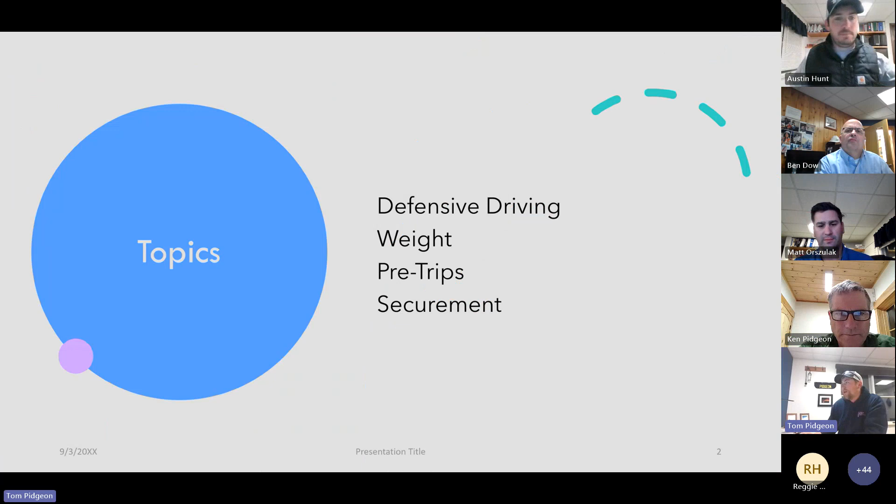There we go. Right. So we're going to talk about defensive driving, your weight, pre-trips, and load securement today.

So for defensive driving, we're going to follow the same principles that we talked about quite a bit. It's just important to remember that you have increased stopping distance and you're going to have fewer places to go. So where you might normally be able to merge and get out of the way of something, you might be stuck in the lane that you're in. So just make sure that you're looking way down the road, looking as far as you can, and planning for the worst case scenario as you drive.

Being alert constantly is big. You have larger blind spots, so you might have cars come up in weird places that you don't expect. When you're turning corners, you might not be able to see everything as well as you normally would, and when you're backing up, it's significantly worse.

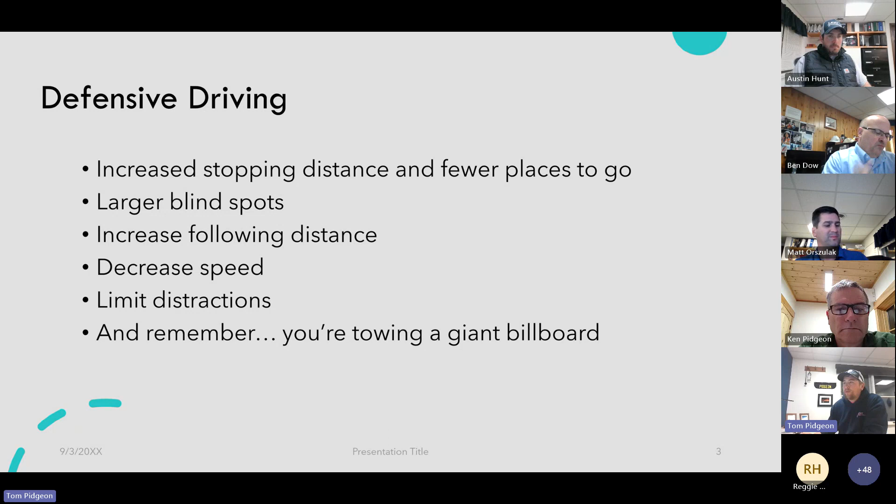You want to increase your following distance, and like I said, look far ahead. You want to decrease your speed. We shouldn't have distractions while we're driving anyway, but you want to limit them. If you have a passenger, try to avoid conversation that you get too involved in that might make you think about things other than the road. And remember, you're towing a giant billboard, so just keep that in mind as you drive. People do love to call and complain about driving.

So next thing we're talking about is weight. Everything that you're towing must be within their gross vehicle weight rating. So most of our trailers are either 9,999 pounds, either derated or they're underneath that just in how they're built. It's also important to follow what you have for an axle rating on those.

So if you have two 3,500 pound axles and you're only going to be towing 7,000 pounds in total, you're obviously below the 9,999. Once you get over 10,000 pounds, then the trailer is added on to the GVWR of the truck. So 26,000 pounds is the cutoff for needing a CDL Class A.

So if you have a CDL Class B, you can tow with a dump truck, a large dump truck, a quarry trailer derated to 9,999 pounds. But the minute that you go over to 10,001 pounds on the trailer, then you now need a Class A CDL.

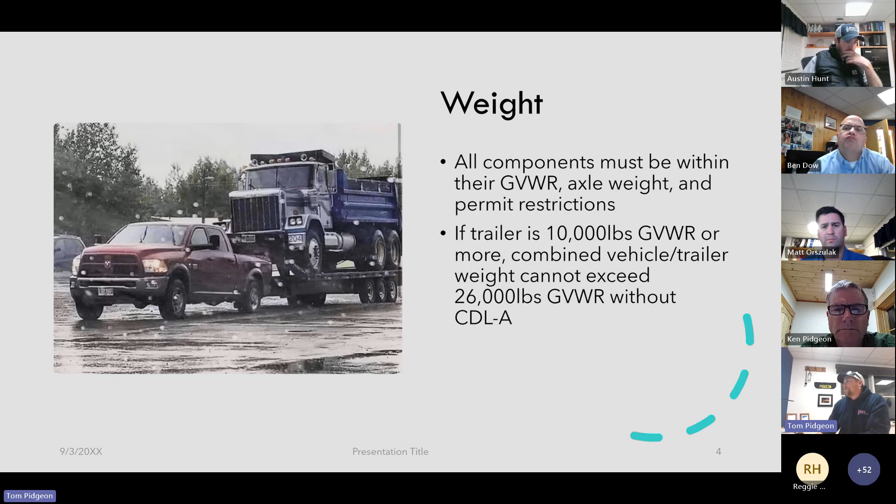So we're just going to talk about the pre-trip. That's the base part of this.

First thing you want to do is perform a 360. Make sure everything looks good, no major rot or rust repairs needed that would negatively affect the trailer and make it unsafe for the road. Walk all the way around it, looking for anything out of place or dangerous. Make sure everything's securely fastened, your decking's good, and your jack's securely up. I've seen a couple times the pin's hanging and not clipped in all the way, so that could pop out on the road and the jack would drag and break off.

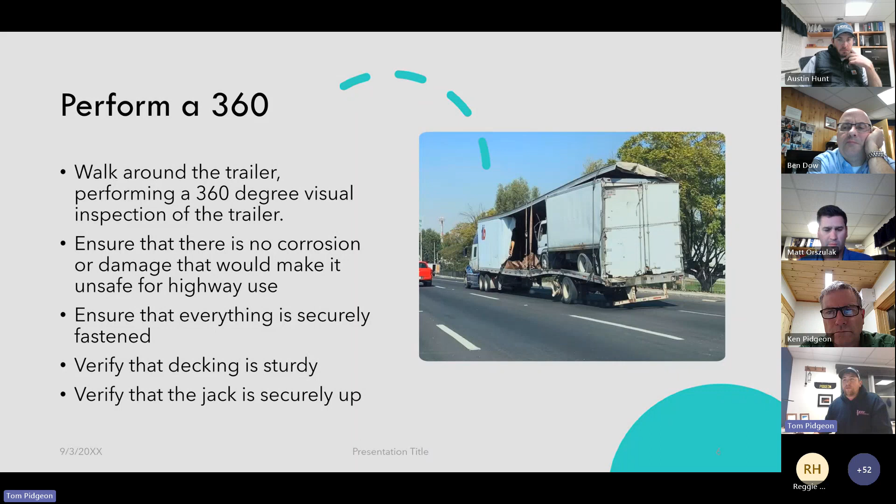So you want to check your tires and lugs. Make sure your lugs are tight, no rust streaks or anything like that. Make sure your tires are properly inflated, have adequate tread, no dry rot, weather checking, bulging, gouges or cuts. If you have a spare, make sure you check it. If you have a single axle trailer, as I learned the hard way, you probably want to make sure you get a spare from the shop before you leave.

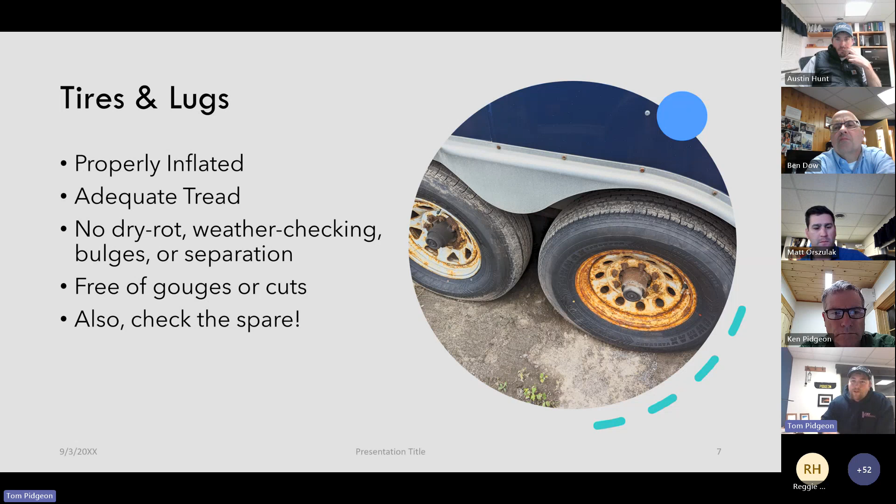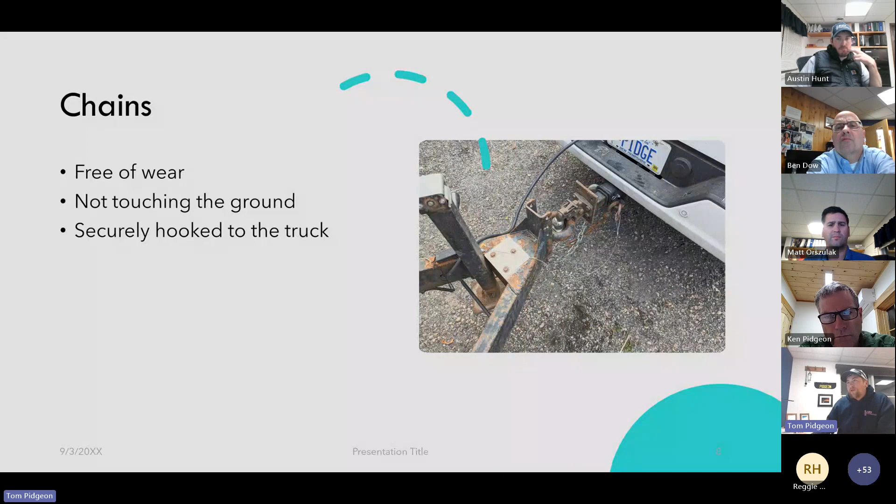You want to make sure your chains are free of wear. They don't need to cross, but sometimes it's easier to cross them to keep them from dragging on the ground, because once they start to get drag marks, DOT will put you out of service. DOT is going to be cracking down on these smaller trailers. Make sure they're not touching the ground and securely hooked to the truck, not the hitch.

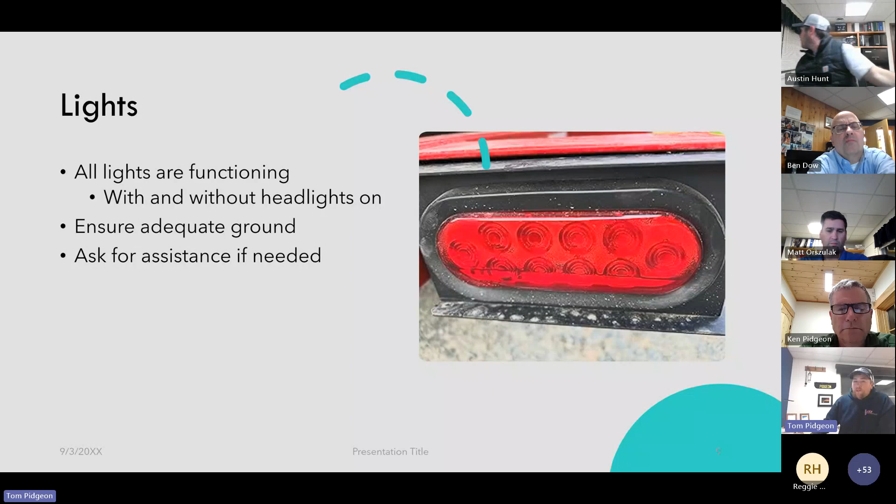You just want to make sure all your lights are functioning all the way around, with and without your headlights on, because your running lights will be on the trailer and it affects your brake light setup. Make sure you have an adequate ground. If they're fading in and out, go talk to the shop and ask for assistance as needed, like with any of these things.

With your brakes, that's the big thing. You want to securely attach to the truck. I have a clevis on my truck, right where you hook the chains, holds it really well. You don't want to hook it into your pin like you see over there. Once you get in the truck, make sure it's registering on your brake controller. If you don't have a brake controller, you shouldn't be towing a trailer with trailer brakes.

One thing DOT is definitely going to be doing is tug testing. They're going to either put a multimeter on the battery on the trailer, or have you unplug the pigtail from the truck. They're going to pull the breakaway and have you try to drive, making sure the trailer stays still. So you should be doing that before you leave as well.

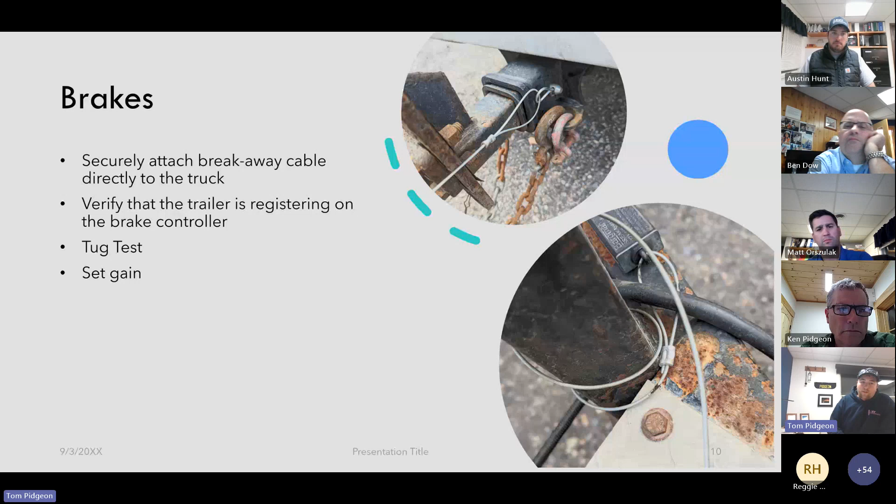And then before you leave, you just want to set the gain. Usually what I do is drive 5 miles an hour or so through the yard, tap the brake controller, and I want it to slow me down but not lock up and drag.

You want to make sure your load's secured, and use the proper chains and straps. If you don't know what the proper chains and straps are, ask somebody. Use proper securement points, and check regularly. I usually strap it down, check before I leave, and then check everywhere that I stop. Loads will shift, so you just want to keep your straps tight.

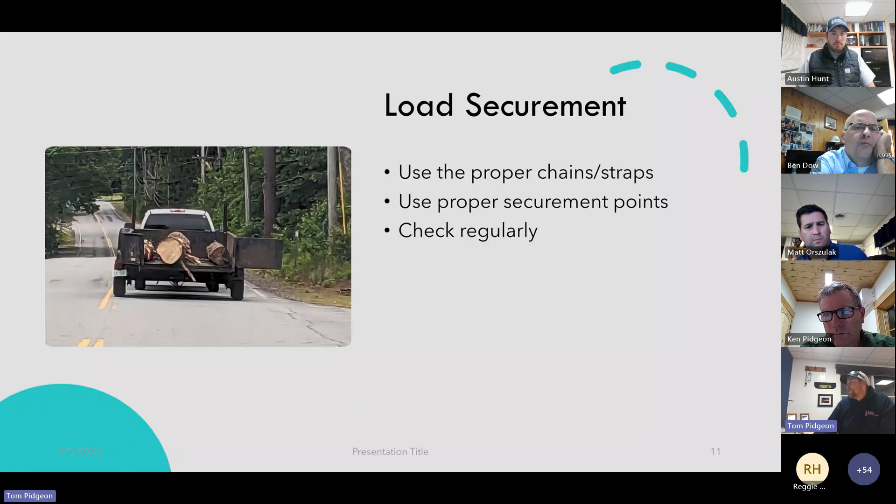And that wraps it up for today.

Thanks, Tom. I have just one thing to add to your really good PowerPoint, just making sure we sweep all the stones and debris off all of our trailers. We've been getting a lot of calls for stones leaving trailers lately. Make sure we're sweeping good.

One other follow-up as well: you didn't mention the weight restrictions on the road as a restriction. The way I look at it is that the vehicle has its restrictions, the registration has limitations, the roadway has the limitation, and the driver has limitations. So, good presentation.

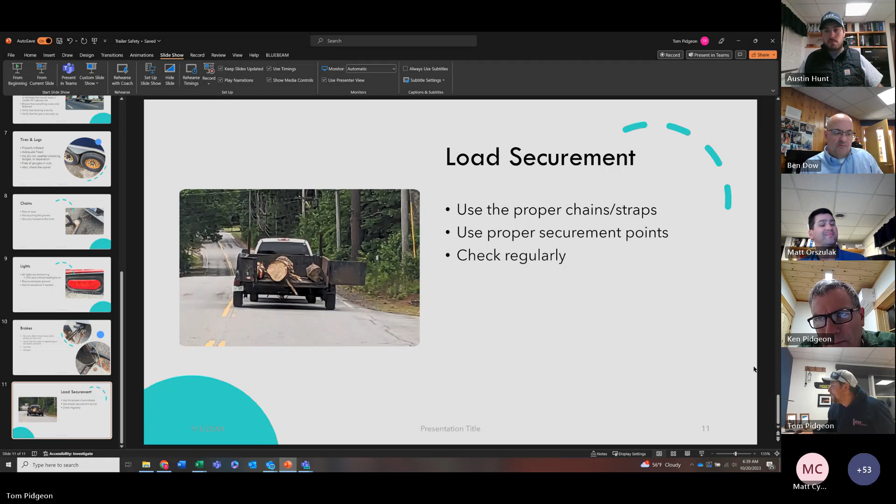All right, I'm trying to unshare right now. Okay, I'll try to take over, my mouse is stuck, so I'm just gonna leave. Here we go. Okay, let me see, is this the screen I want? You see my screen? We have it. All right.

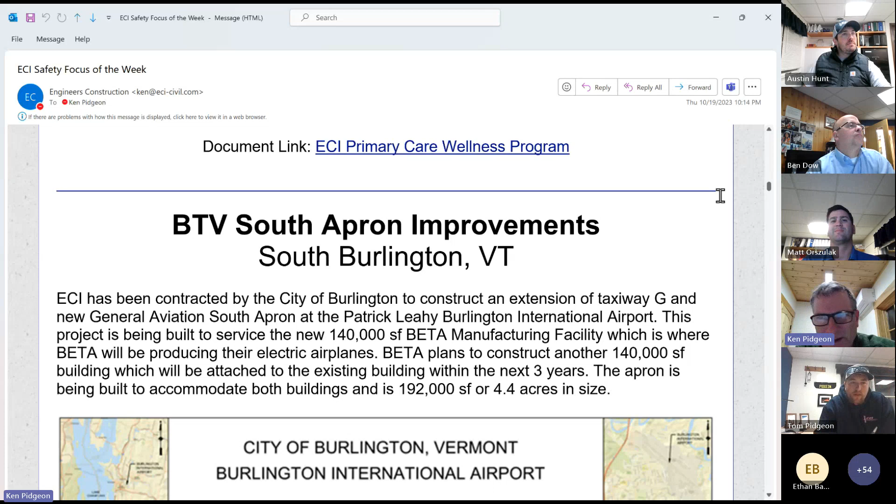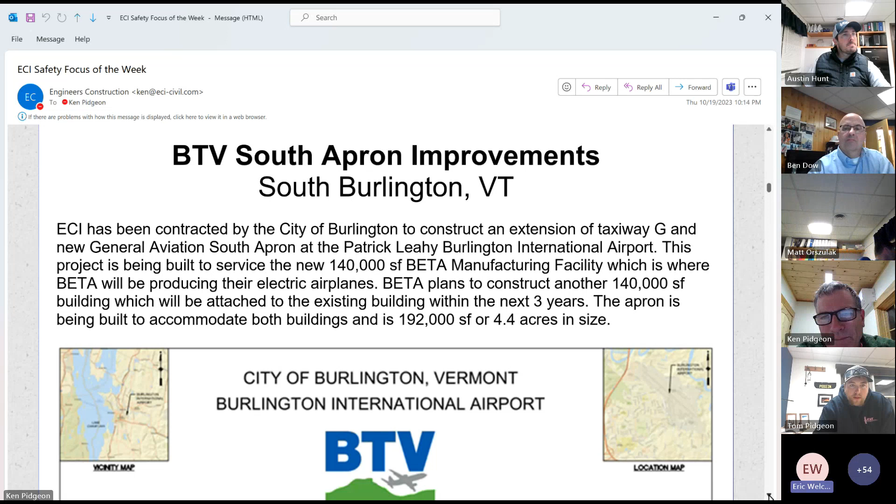Eric, are you out there? Welcome. I hope I moved that photo to the right spot — I got confused after I put it together last night. I emailed you but didn't hear back, so I just sent it off the way I had it. It's all good. Do you want to take over or should I just scroll ahead? You can scroll ahead and I'll read. I'll slide it up a little further here — how's that? Looks good.

ECI has been contracted by the City of Burlington to construct an extension of taxiway G and a new general aviation south apron at the Patrick Leahy Burlington International Airport. The project is being built to service the new 140,000 square foot Beta manufacturing facility, where Beta will be producing their electric airplanes.

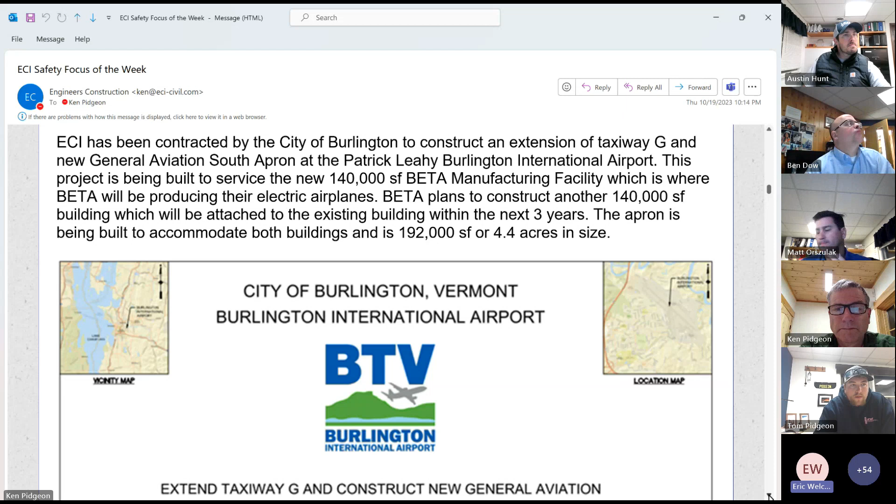Beta plans to construct another 140,000 square foot building, attached to the existing one, within the next 3 years. The apron is being built to accommodate both buildings and is 192,000 square feet, or 4.4 acres, in size. That's a big building — big apron too. This is just the cover sheet of our contract.

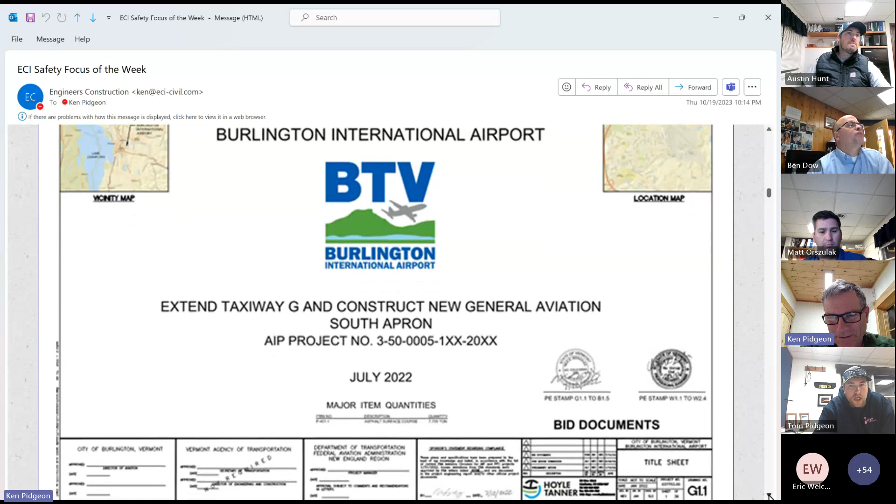The project has had multiple challenges since it was bid. It was bid in August of '22, and because of permit and funding issues, the contract wasn't signed until May of '23. By then, ECI had already acquired enough work for the 2023 construction season, so we had to seek out a subcontractor to perform the drainage scope in order to meet the new schedule, which was to provide Beta some sort of access over the new apron this year.

There was a water line and storm drain that needed to be installed inside and under the airside of the fence. To be allowed inside the airside fence to work, a person must be badged, or be within 50 feet of a badged person, called an escort. An application, online training, and an airside ride with BTV ops was required to obtain a SIDA badge.

The water line was located along a taxiway, so there were restrictions on where we could put our spoil piles and on the heights of those piles. When we installed the water line across the apron, we had to shut down the taxiway, which involved temporary striping and installation of barricades. The temporary striping provided planes an alternate route to use while the taxiway was shut down.

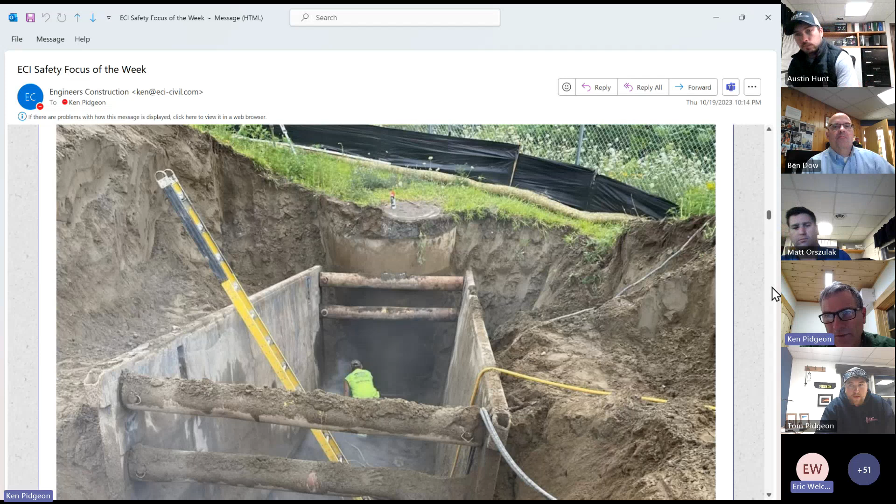You want to keep scrolling through. I think

This was one of two storm chamber systems on the project. One is specifically for a trench drain where de-icing occurs on the planes. That's this chamber system, and it has a liner to keep that water isolated in the chamber system. The other chamber system was for another set of trench drains where they don't put any chemicals or de-icing on the planes. They have to pump it out and transfer it to a treatment plant.

Underneath the fabric there, underneath these chambers, is 12 inches of stone. And I forget, Mark might remember, but I think there's 24 inches of concrete sand. And then there's an 8-inch perforated pipe. So the thought is the water goes down through the stone, the sand, and into the pipe. By that time it's treated, quote unquote, and then it goes out to the storm drain system.

Even the antifreeze in the de-icing area, you mean? Yes. And this was Ken - I don't know if you remember, but we had to come up with the bearing strength of this native soil. Oh, yep, yep, I guess it worked.

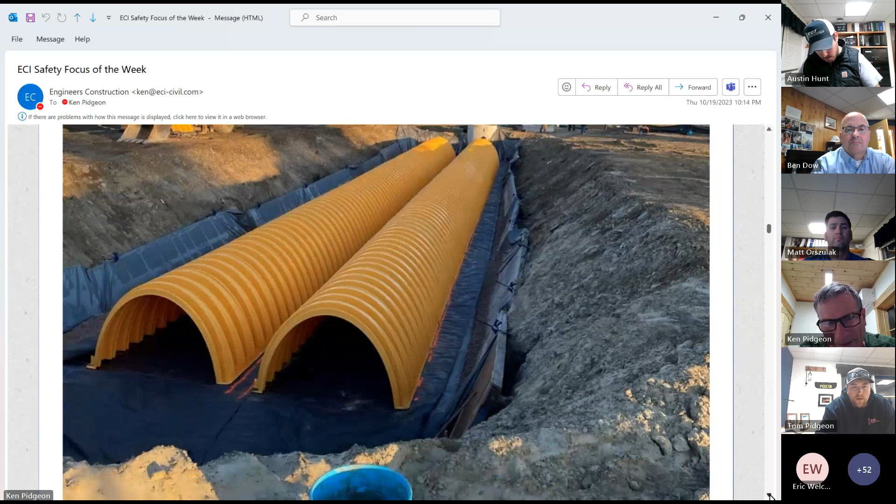Yeah, okay, all right, good with this slide? I'll advance. If I can get to the next one without overshooting. There we go, there we go.

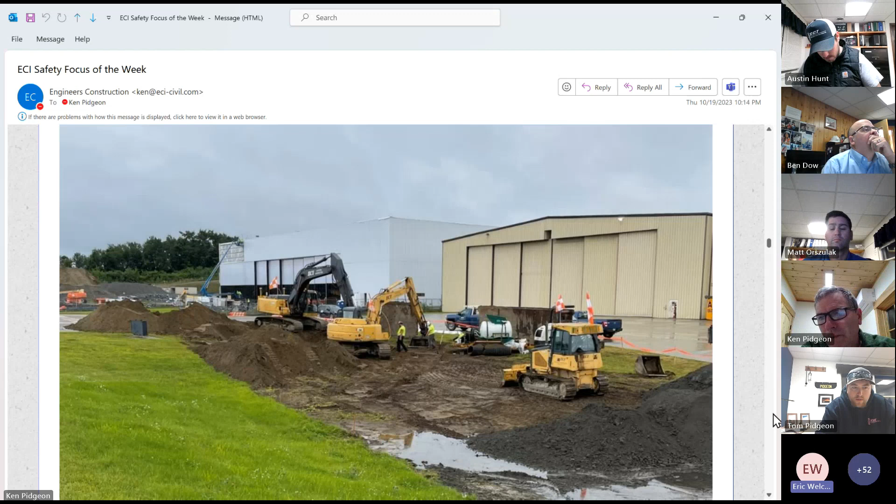You can keep scrolling to the next slide. There's a good picture of where we connected up by the apron sign, is where we connected to the existing water main. And you can see the barricades in the background when the taxiway is shut down.

And then this road on the left here is where the planes use that as access to the runway while we had the taxiway shut down.

I think the next slide. Coordination - a lot of coordination with the airport then. It's a lot of coordination, and then when you think you have things coordinated and you go to do the work, they say, well, you can't do it right now. You have to wait a few hours because we weren't quite ready.

There's a good picture of the barricades that we used to shut the taxiway down. They have lights on top, solar powered, so at night the planes could see them. You can see the crown of the surface there pretty clearly with those little segmental barricades.

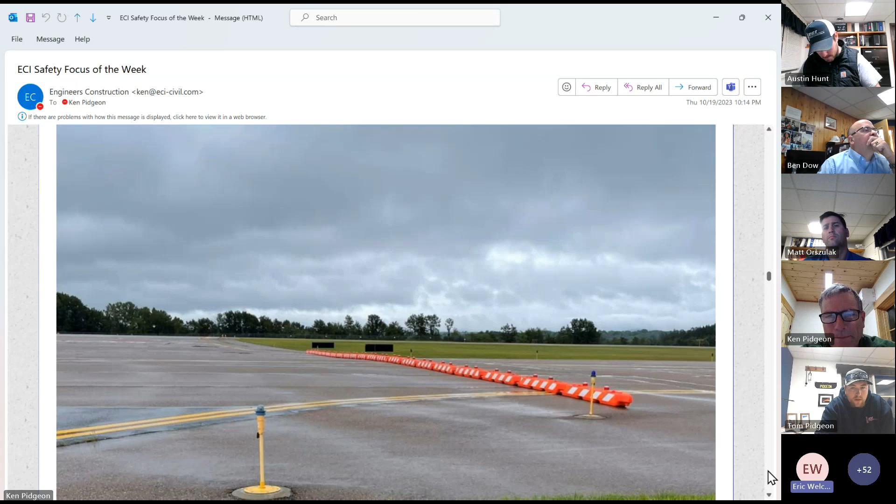Yep, and the runway is actually in the background. The runway. Oh, okay, yep. I can keep there. Oh, okay.

And this is Dylan's crew putting the water main, 8-inch ductile wrapped, across the apron, and you can see the thickness of the pavement. There's 9 inches of pavement there.

And one of the other requirements, FAA requirements, is 100% modified compaction underneath pavement.

So that sheep foot roller worked pretty good in the sand backfill? It did, we ended up going to the smooth drum. Did you? Yeah, and just because the sheep's foot, the little feet on it were 4 inches, when it went through it wasn't giving very good compaction. Oh, well, compaction was there underneath, but they weren't testing that deep.

So right, well, they weren't testing very well then. I'm sure we had better compaction with this overall, but they liked their numbers better, so they had us do it differently, with less compaction just to have a good number. And plus we're using native soils. Mike Ronaldo was doing Proctor's, and you know, it's a big effort to make it happen.

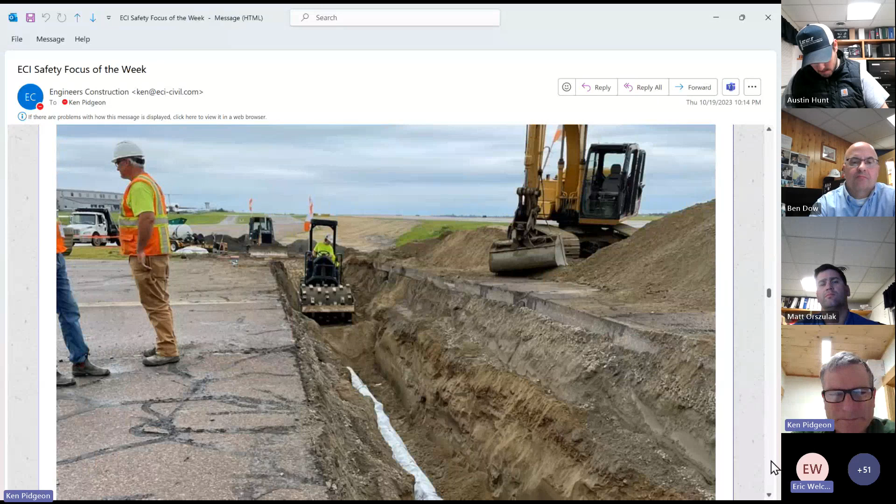So the major challenge for this project was scheduling the ECI start date. The apron site was a staging area for the Beta building project. There were stockpiles of sand, gravel, concrete, and a geothermal piping trench running right down the middle of our site. We obviously could not begin our work until the staging area was removed, and Beta was not really interested in moving the piles as there was no place to move them to. This delay ultimately made it so Beta would not have access to the taxiway over the apron this season, and we had to build them a temporary road from their hangar door to an adjacent apron to provide temporary access until the project is complete.

So this following photo is a real good photo of what we were up against.

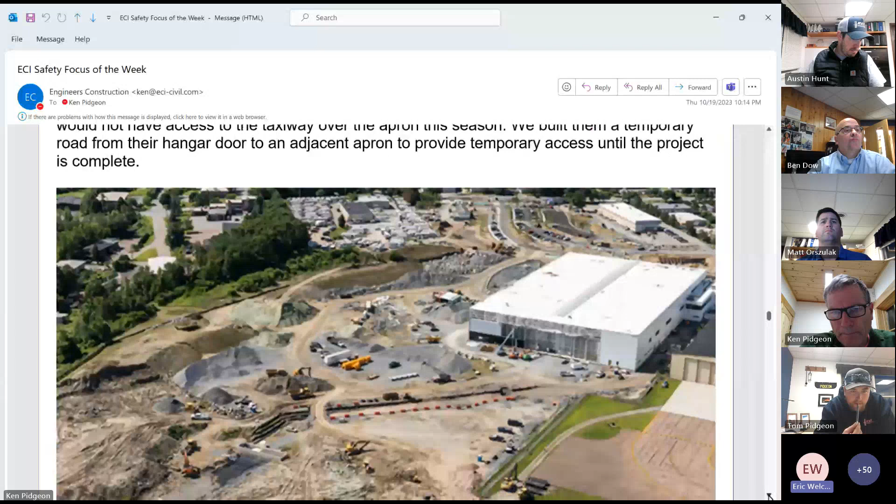So there's the Beta building, and you can see at the bottom of the screen, Jay McDonald's working. That's the area of the storm chambers. Dylan's crew is just inside the fence. There's the water pipe right at the end of the taxiway.

Can you put your cursor on that geothermal trench? Right here, yeah. So that trench basically split our site in half. And then you can see all the piles of dense grade, the trailers, and then up in the top corner was a giant pile of 3/4 inch stone.

Monash was working on the geothermal. SD Ireland was working those stockpiles every day. As you can see, the construction was going on the Beta building hangar doors. Monash was working on the stormwater, and we were laying water lines. So there's 5 different contractors working on this site when we first started.

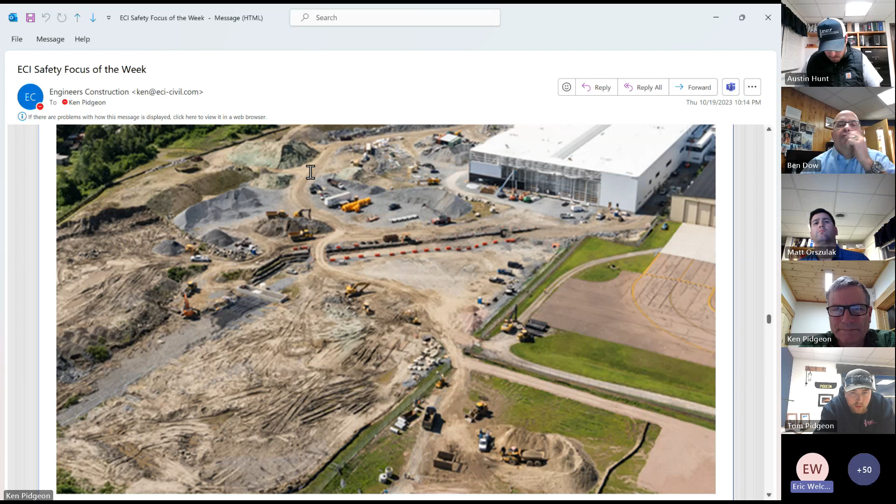Yep. Yeah, yes. Okay, next slide, next slide. Okay.

So this is Derek, I believe, Canilian, loading the mass excavation. Derek and Nick Wilson loaded out the majority of the stuff. I'm sure they were dreaming about loading trucks in their sleep.

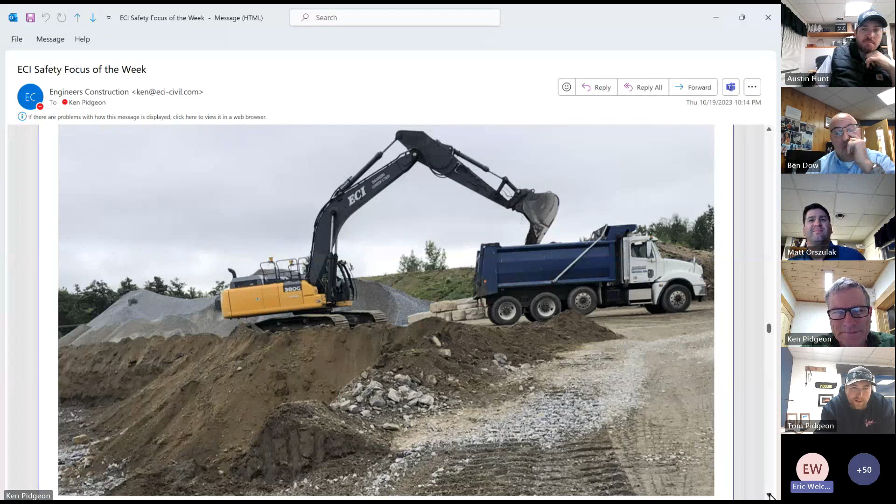Is the narrative below this slide, Ken? I think so. There we go. Yep, oh, there we go.

So the project included a mass excavation and export of what turns out is going to be 68,000 cubic yards of material when we're complete. The majority of the material was exported for approximately 6 weeks with an average of 2,200 cubic yards leaving the site per day. We had as many as 17 trucks per day hauling to multiple locations with men and equipment at each location handling the material.

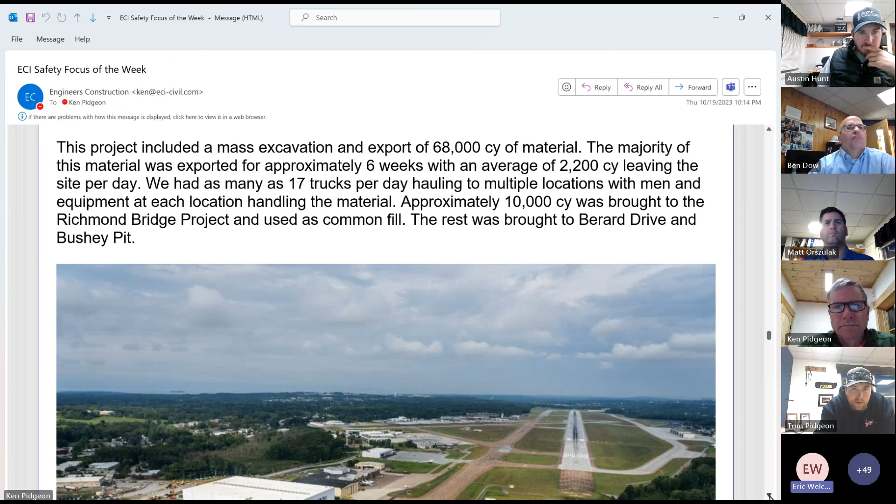Approximately 10,000 cubic yards was brought to the Richmond Bridge project and used as common fill. The rest was brought to Berard Drive and Bushey Pit.

These aerial photos were taken by Beta, and they're really good photos to show our site. It's a big site. This was taken, I think, must be at the beginning of October. As you can see, that big, huge pile of stone is still in the way.

So we basically chased them out of the site. Charlie did with the excavation, and we ended up having to move some of the piles, which we got paid for. So this is a good picture.

You can see the runway. You can see taxiway G, and you can see our apron site. Very cool picture.

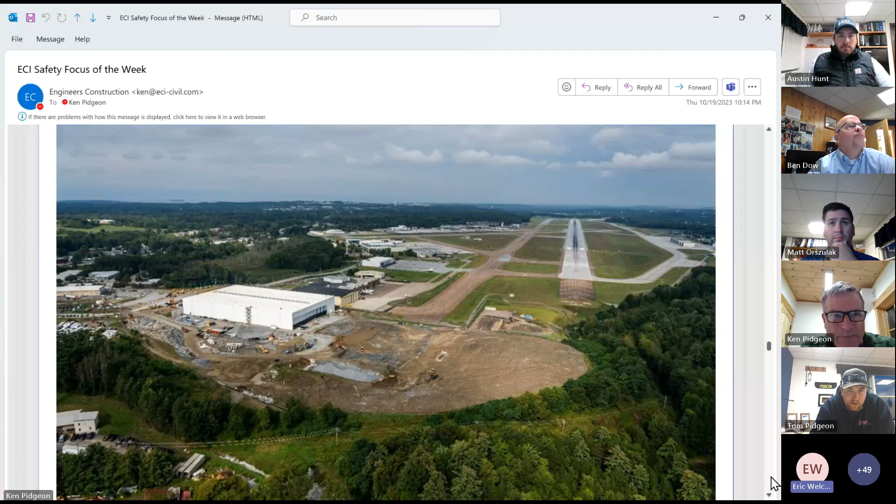I think the next one. Blasting, drilling and blasting.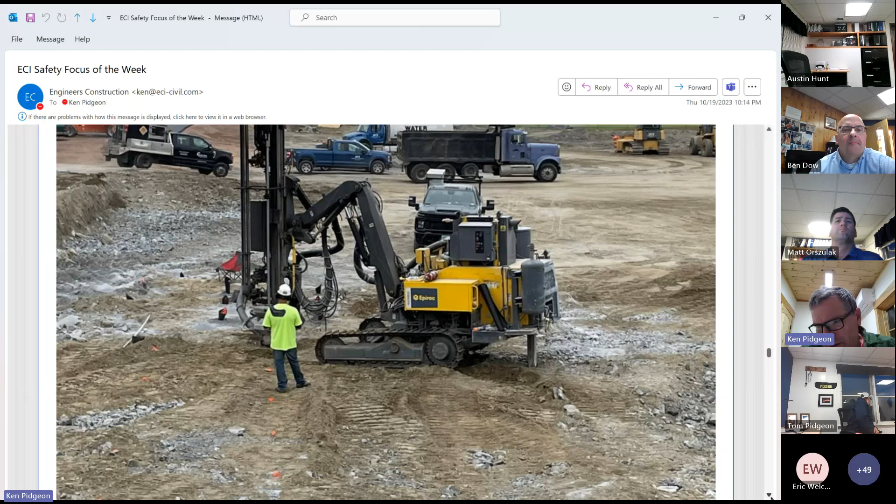There was a blast. There was a rock item in the... there's a rock pay item, but if you looked at the borings, I think you have text here below, right? I don't. I think it got lost. I was looking through. Oh, did it? Oh yeah, okay, all right, sorry about that. That's okay.

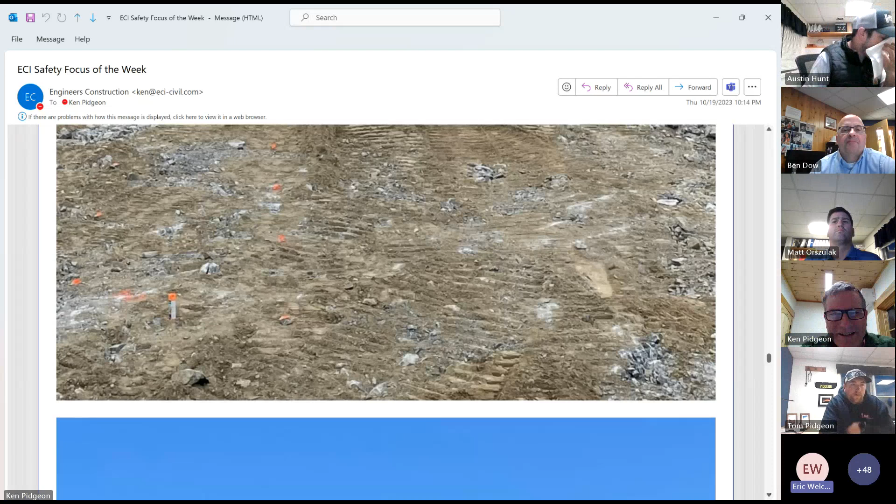There was a pay item for rock excavation, and there was soil borings given in the bid documents, but the soil borings really led you to indicate that there wasn't going to be much ledge here. So we bid the job thinking that we could just hammer out what was there. Well, when we actually excavated the material out, there was ledge everywhere.

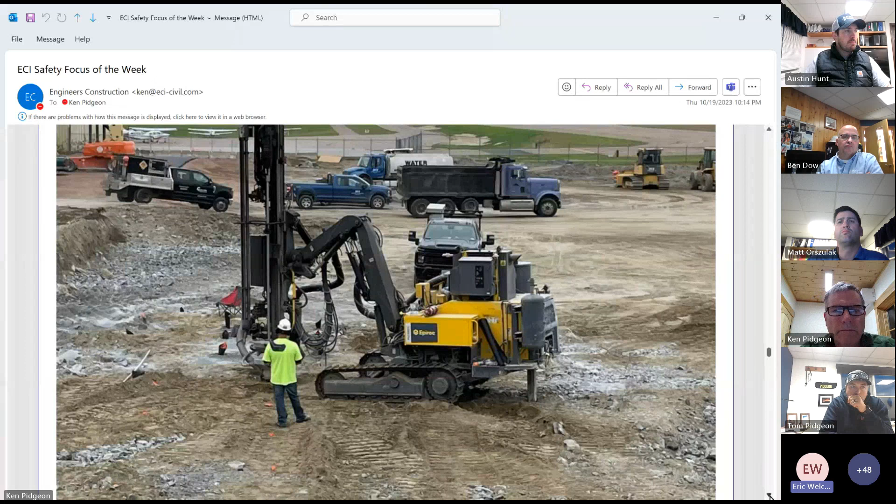So we ended up having to bring in Capital Rock, and we had to bring in a blasting consultant to come up with a blasting plan and do seismograph readings. And I had to develop a blasting communications plan for the project. That communications plan had almost 60 people or companies on it that we had to notify every day of the blasting activities.

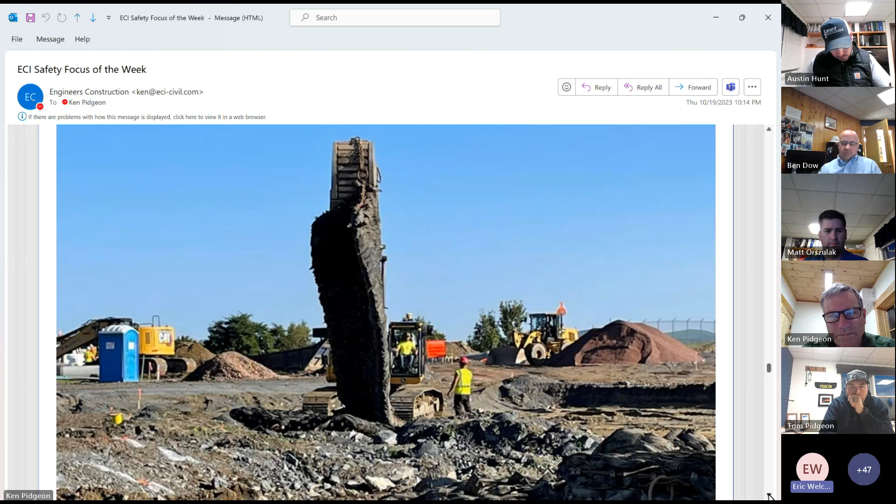Every night I had to send an email to everybody with the blasting times for the next day. Each day, 30 minutes before the blast we had to send a text, and 5 minutes before another text, then text again after the successful blast. 10 minutes before the blast we had to contact the control tower to make sure there was no air traffic in the area. Sometimes that led to delays, one time about 2 hours. It was a big process.

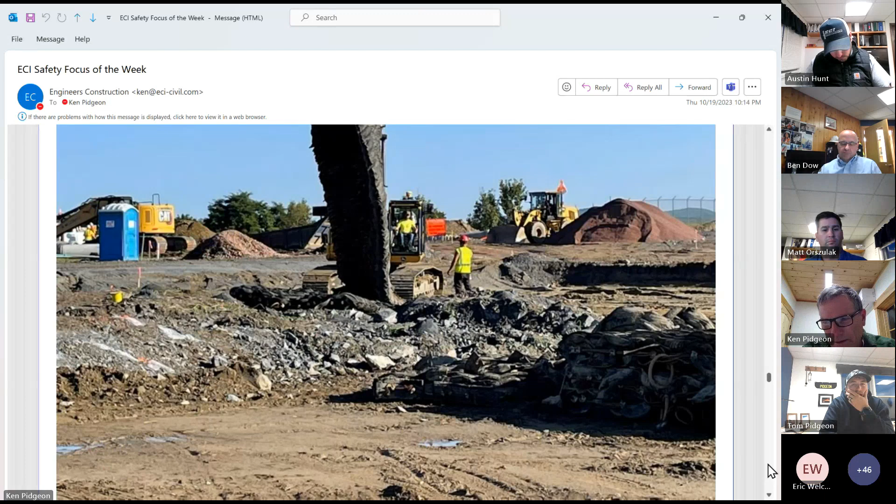There's Nick setting some mats on the first blast, and Derek too. The other picture shows driller Jay drilling, and then we have the geophone doing the seismic readings.

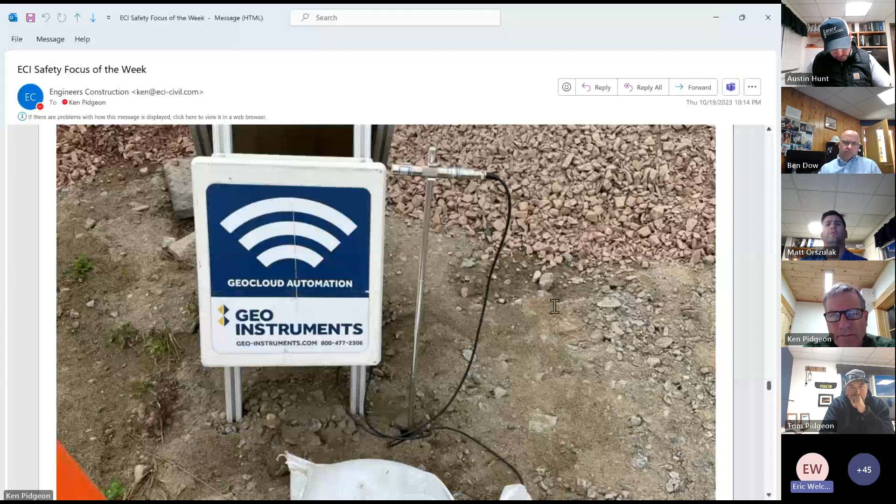This was pretty cool, a remote unit with a modem in it that recorded all day long and reported back to a website, where all the information was collected. We had 2 there, and Beta had 2 also.

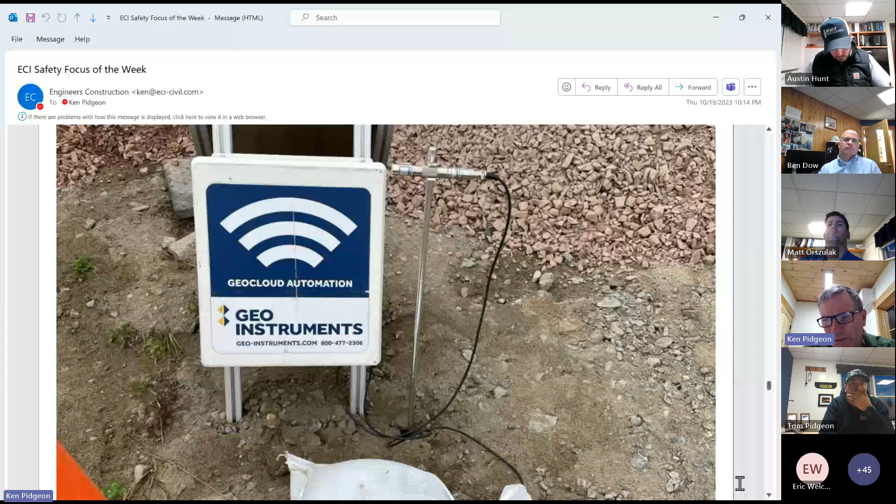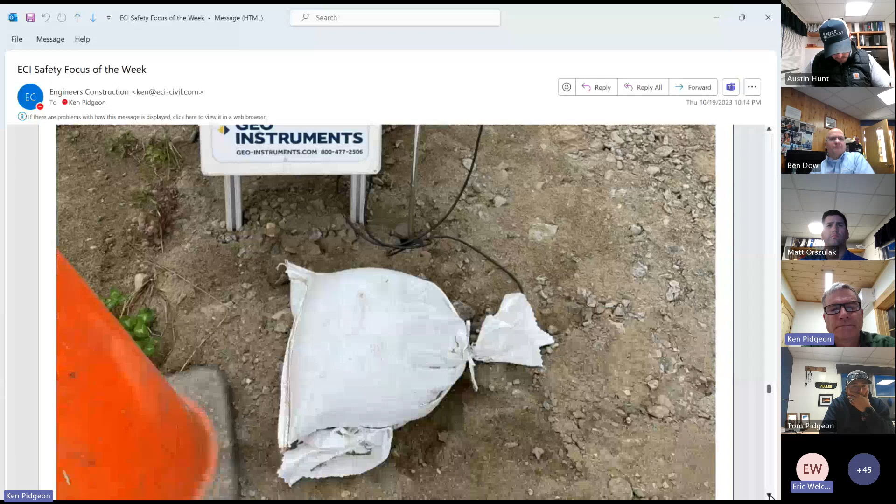It looks like there was some sort of air blast measuring device as well as a ground seismograph underneath. The seismograph would be under the sandbags here, a measuring device underneath there. The other one is like a percussion device, an air blast percussion sensor, set up above.

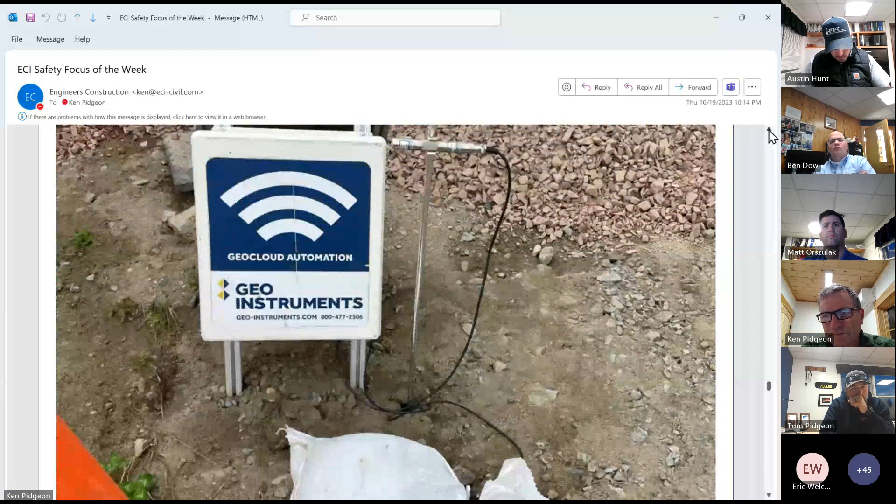These are some pictures from the site, actually from a couple weeks ago, showing the rock excavation.

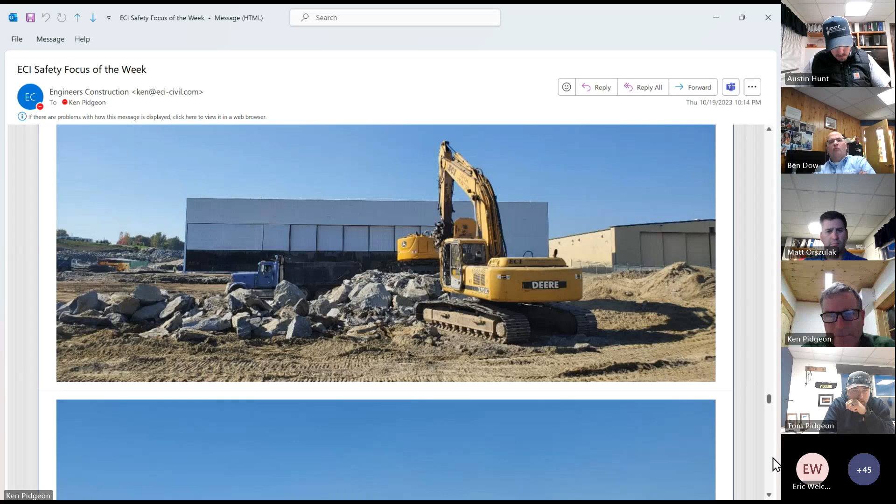This one and the next one are from yesterday. So this one up here on top is the last of the rock excavation photos.

We got a lot of rock here. The neat in-place amount was going to be about 4,000 yards, but since we were blasting, the cut was only anywhere from 1 to 4 feet. The fluff was at least 50%.

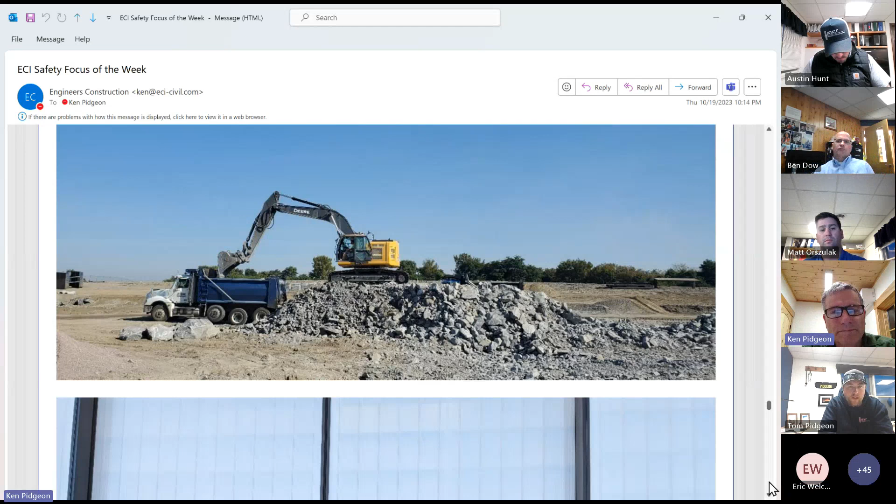This was yesterday. This is a picture of the Beta doors. This is actually the temporary 20-foot wide road that we put in for them from their doors, and you can see the reflection of all the work going on outside on the glass.

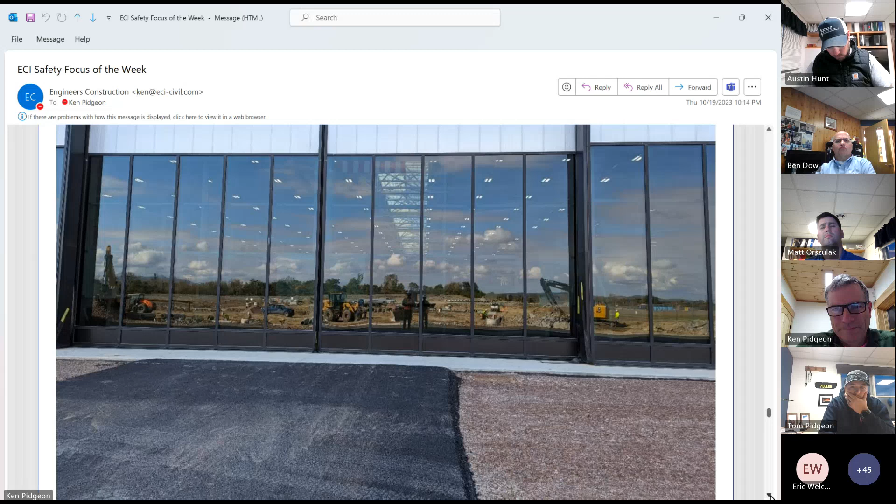And this is the picture where it hooks in to the airport apron.

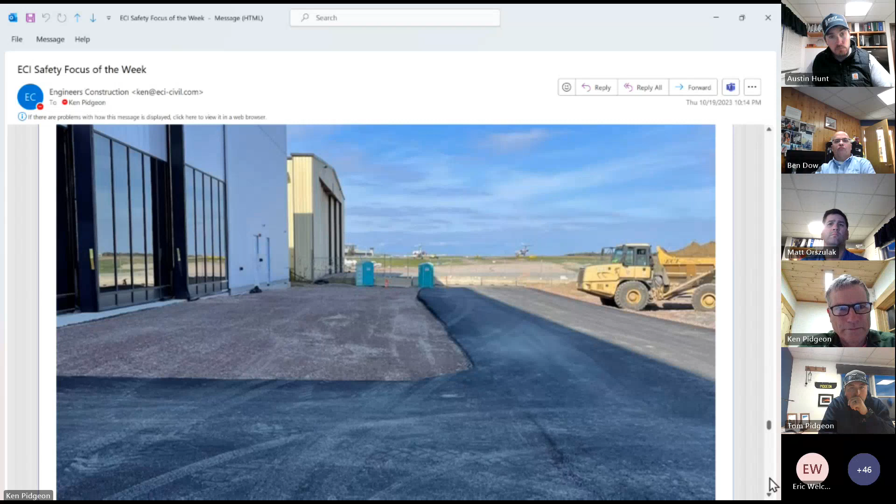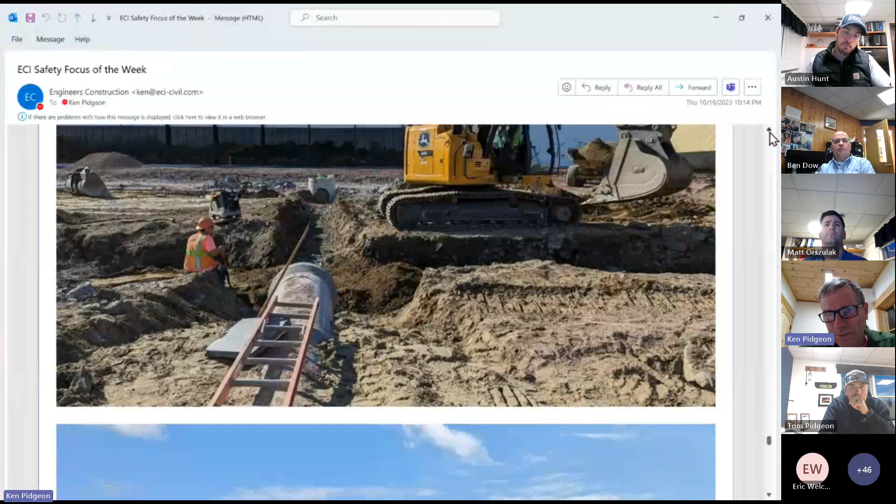This was yesterday again, doing a tie-in for the water line. The water line is underneath, it's installed, and then they're laying a storm drain over top of the water line.

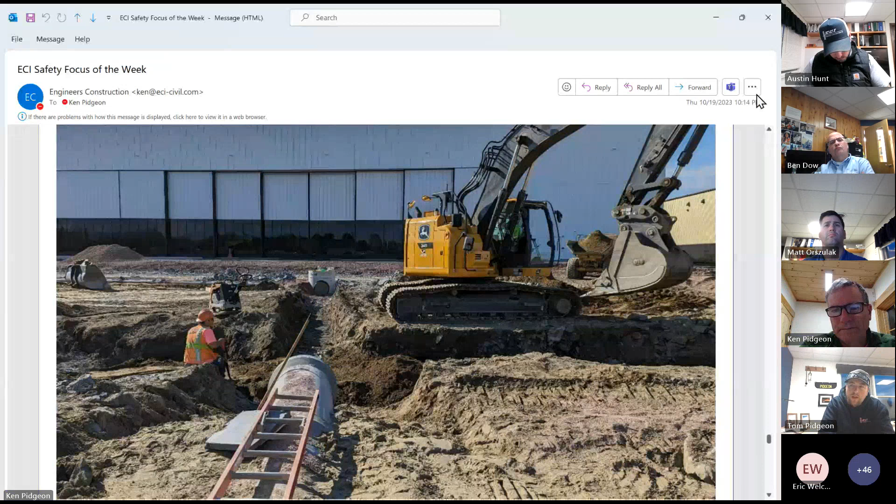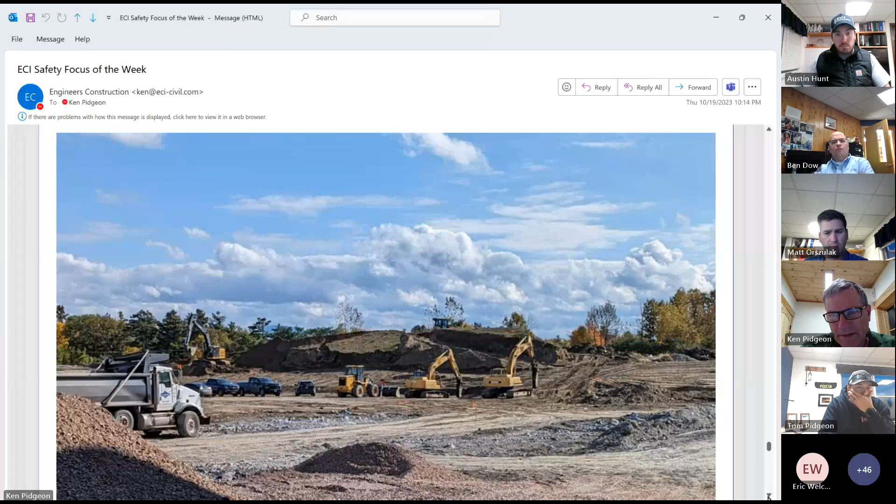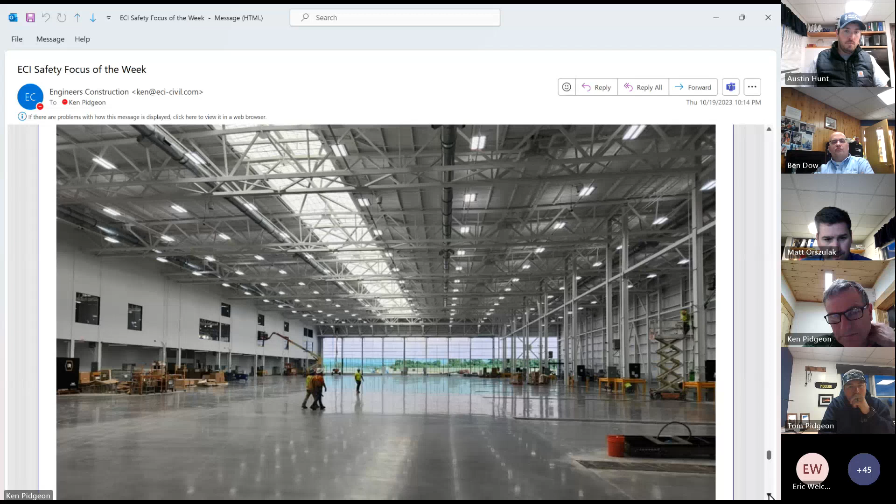Massive, and tall. That's just the open part. On the left there's another 50 to 60 feet of 3 stories of offices. Pretty cool.

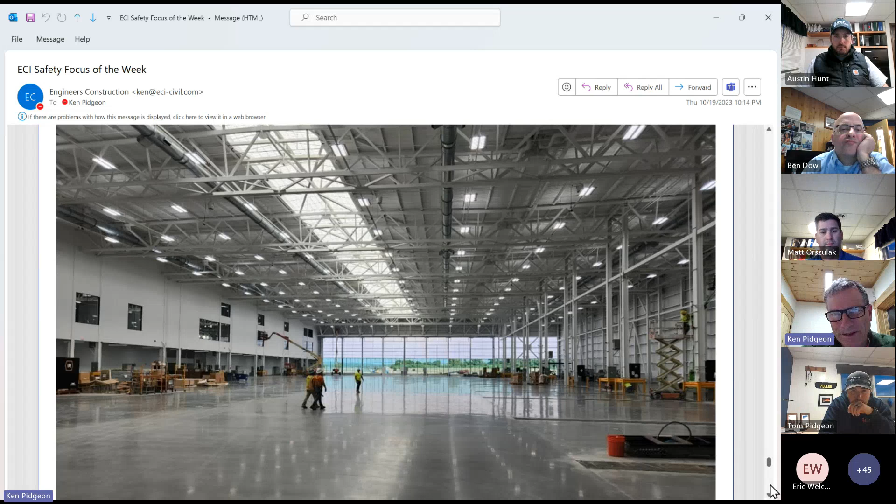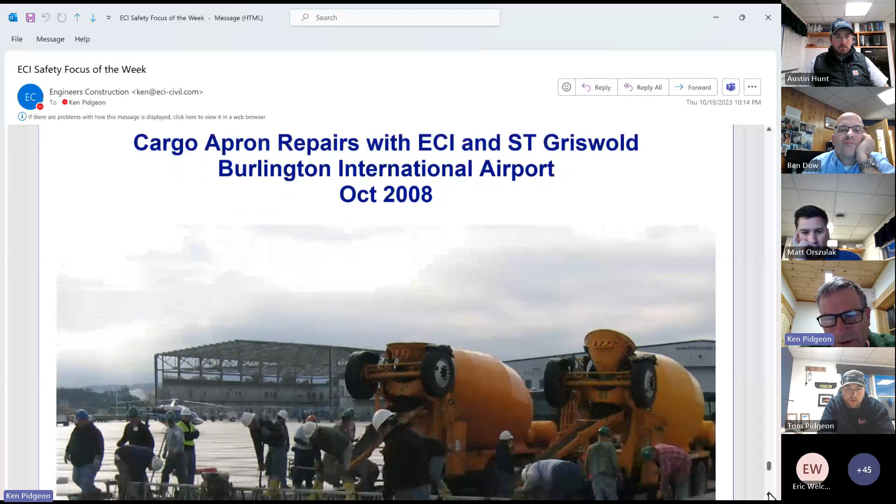This is the cargo apron repairs with ECI and ST Griswold at the Burlington International Airport in October of 2008.

I don't know if I recognize anyone in there. Ronnie out there and Todd. That was Tim Parent's guys, and I think there's a couple of Griswold guys there too. I remember, I was on Greenlands, that job. I'm not sure, that might be me over by the mixer. Yeah, that was a pretty cool job.